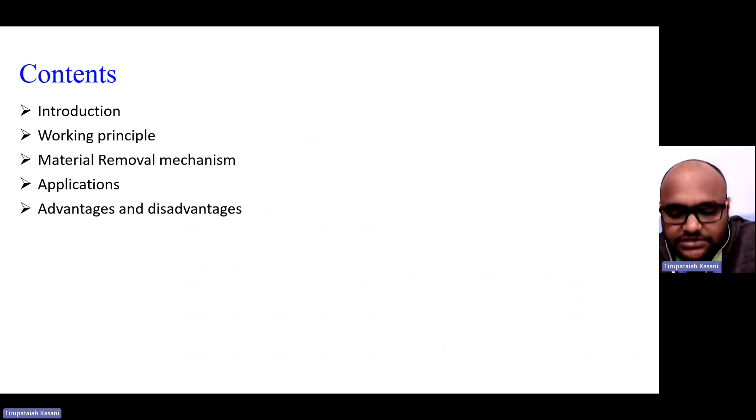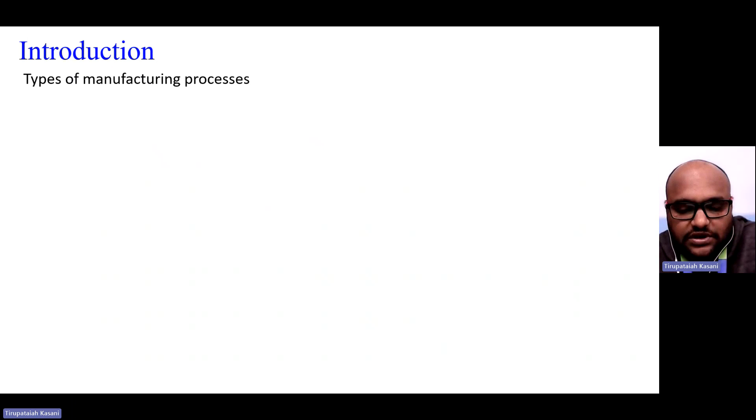First, we will start with the introduction part, that is, what are the different types of manufacturing process. We can categorize manufacturing processes broadly into casting, joining, forging, and machining.

The first one is casting, wherein molten metal is poured into a mold cavity, and we allow that molten metal to solidify as per the shape and size of the mold cavity that is created, to get the final product.

The next one is the joining process, wherein we can join two or more metals. For example, welding is a permanent kind of joint, while screws, nuts and bolts form a temporary joining process. We can also consider rivet joints.

The next one is the forging process. This is a kind of manufacturing process wherein the metal is subjected to compression force or tension force, either at room temperature or at higher temperatures, depending upon the type of material we are using.

For example, if we consider steel, to work over it and change its size and shape into the desired shape, we heat the metal to elevated temperatures, for example above 600 or 800 degrees centigrade. After converting the iron into a red hot state, we apply compressive forces to get the size and shape of the component we require.

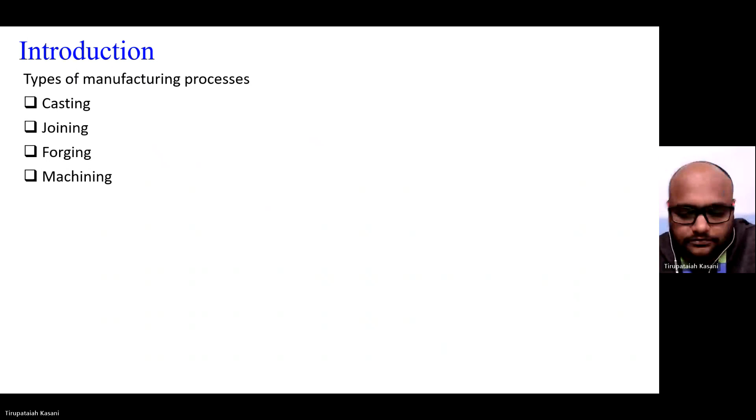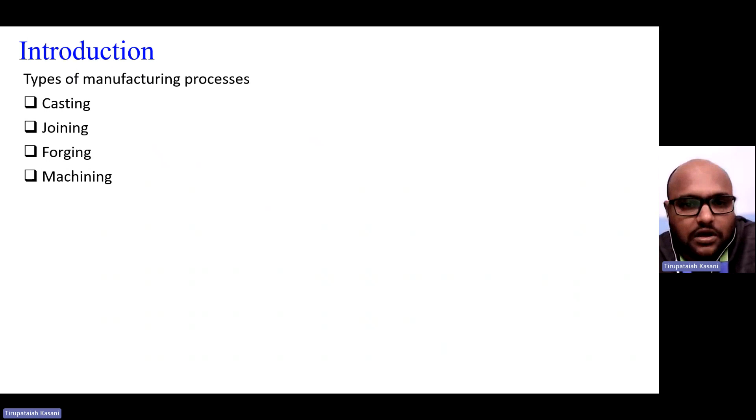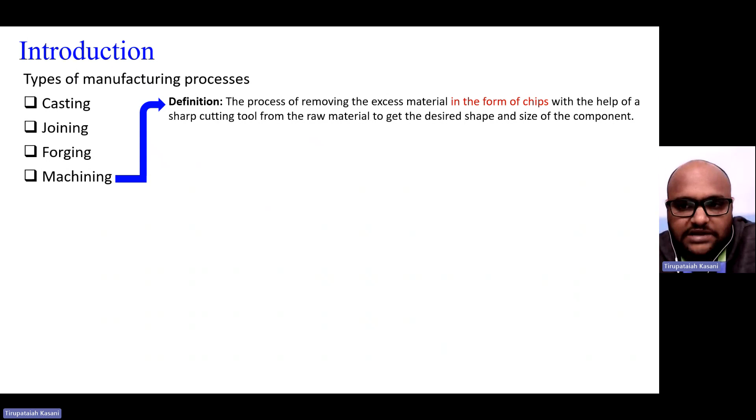And the next one is the machining process, wherein metal is removed from the bulk or raw material in the form of chips using a cutting tool. The definition of machining process is the process of removing excess material in the form of chips with the help of a sharp cutting tool from the raw material, to get the desired shape and size of the component.

Now we will look into the conventional machining process, wherein direct contact and relative motion between the workpiece material and the tool are a must. For example, lathe turning, drilling, and milling.

Let me open the pointer options. This is the lathe turning. This is the workpiece, and this is the direction of rotation after mounting in a 3-jaw or 4-jaw chuck. This is the cutting tool, and the feed motion is along the axis of the rotating workpiece.

This is the chip that is removed from the work material. This is the machined surface and this is the unmachined surface, and this is the cutting tool. The material removed from the raw material is called chips.

Another kind of machining process is drilling. Here it is the drill bit, this is the feed motion of the drill bit into the workpiece, and this is the rotation of the drill bit. After removing material in the form of chips, those chips are ejected out through the flutes.

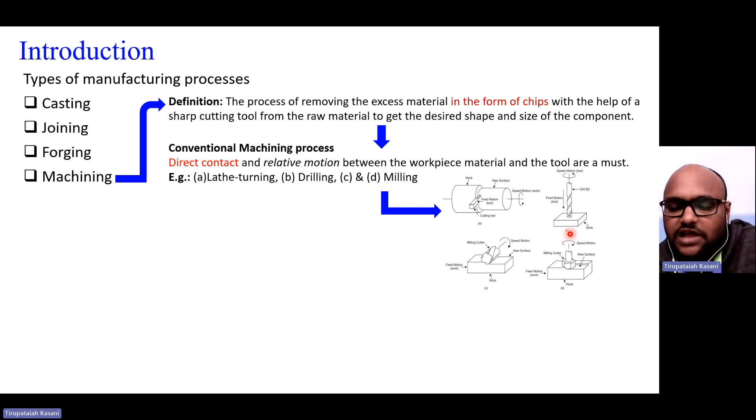Similarly, C and D represent milling. These two are milling cutters. This is a peripheral milling cutter, where the teeth are located on the periphery of the rotating element. And here is the end mill cutter, wherein the cutting teeth are located at the end portion of the rotating element.

These two arrows show the direction of rotation of the milling cutter and this is the slab. This feed motion is the workpiece motion, and this is the rotating cutter. The chip flow happens here, meaning the chips are ejected out in this portion.

Here in this case also, this is the work and this is the rotation of the milling cutter. This is the machined surface and this is the unmachined surface. Due to this rotation, the cutting edges come in contact with the raw material and the chips will be ejected out.

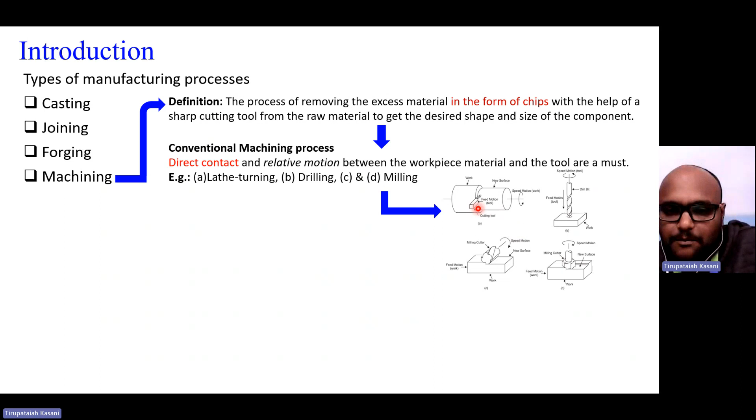Small chips will be ejected out as we remove material. In conventional machining processes, in all these four cases, direct contact of the workpiece and the tool is a must. That is the reason we call this a conventional machining process.

Then what is unconventional machining process? We can call it unconventional, non-conventional, or non-traditional machining process. This is a special type of machining process in which there is no direct contact between the tool and workpiece. Here, unlike conventional machining, there is no direct contact between the tool and the workpiece.

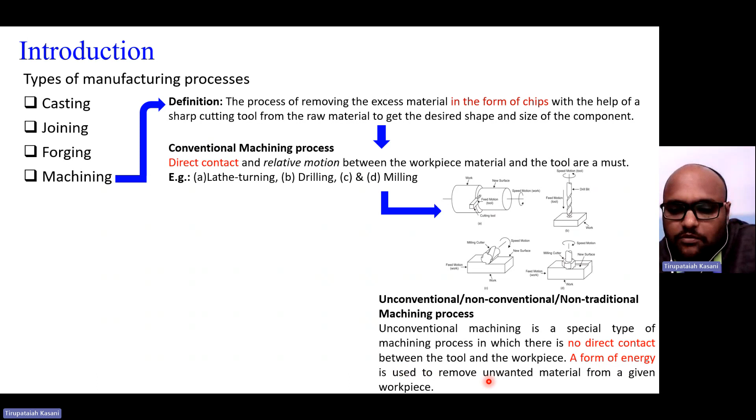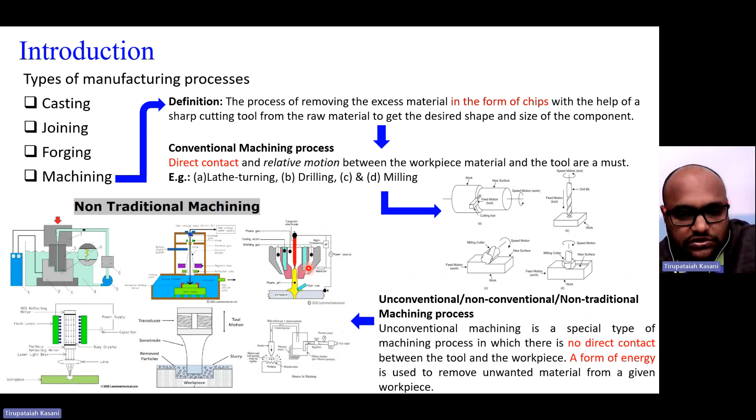We will try to understand these unconventional processes with their different kinds of applications, and what are the advantages and disadvantages associated with each machining process. Now we will see them one by one.

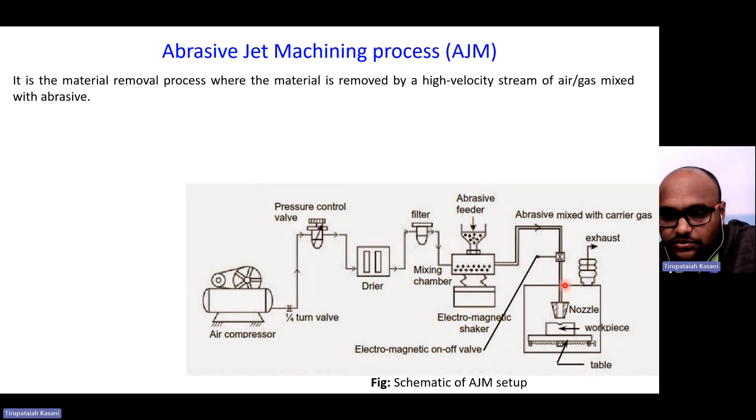Now we will see the material removal process, where material is removed by a high velocity stream of air or gas mixed with abrasive. We have already seen this is the mixing chamber. This is the air, and the abrasive particles will mix and flow through this nozzle. What is the working principle?

A focused stream of abrasive particles carried by high pressure air or gas is made to impinge on the work surface through a nozzle, and the work material is removed by erosion from high velocity abrasive particles. When the high velocity abrasive particle hits the top surface of the workpiece material, due to erosion the material is separated out from the workpiece in the form of chips. Those are taken away by the flow of air from the machining zone. This mechanism of material removal is erosion in abrasive jet machining.

The typical material removal rate, indicated as MRR, will be 1.8 to 5.8 mm cube per minute. These are typical values, not standard.

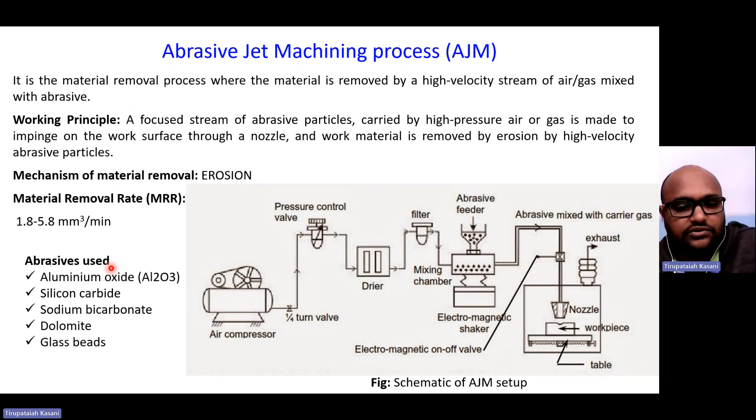Here are the abrasives. Different types of abrasives used in the AJM process include aluminum oxide (Al2O3), silicon carbide, sodium bicarbonate, dolomite, and glass beads. These are a few; there are others used depending on the material and the size of the material being machined.

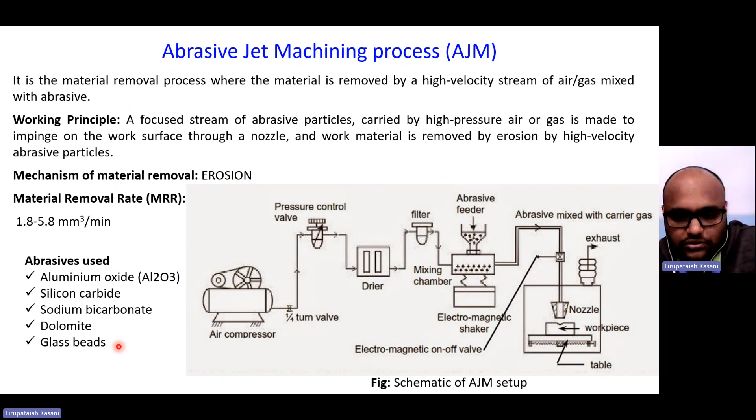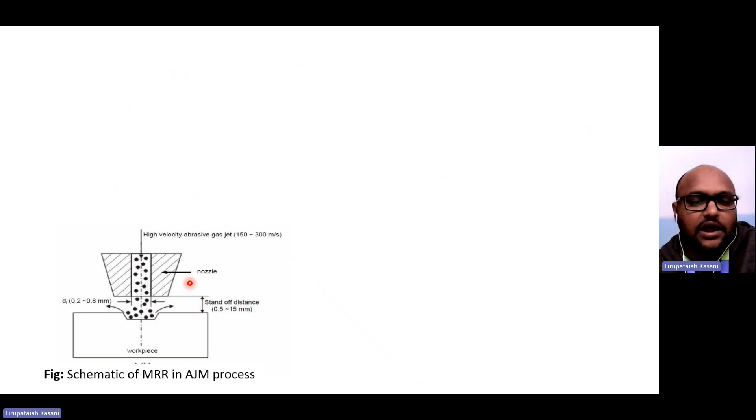This is a high velocity abrasive gas jet, 150 to 300 meters per second - typical values. This Di is the diameter of the nozzle tip, and this is the standoff distance.

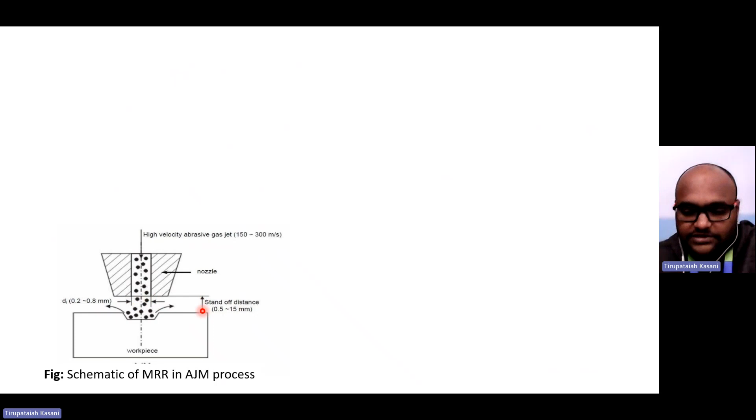This is the schematic of material removal. When it comes to the effect of NTD - what is this NTD? Nozzle tip distance, in the abrasive jet machining process. Here is the nozzle. If there is no workpiece, then the stream of abrasive particles along with air will flow like this.

From the starting point, means from the nozzle tip, as the stream goes down, it is bulging or diverging. The stream will be diverging. Means if the standoff distance or NTD, the nozzle tip distance, is the same or varies.

If the standoff distance or NTD is increasing to 0.75, 1, 1.5, 2 mm, see here, at 0.5 mm width of the material is removed. When NTD increases to 1 mm, the width also increases. Why? Because here it is diverging.

Means the top side surface of the workpiece material, as the distance NTD increases from 0.75 to 2 mm, the top surface exposed to the stream of abrasives and air is also increasing. That is the reason the machining area or region is also increasing, from 0.5 to 0.7, 0.7 to 1, 1 to 1.5.

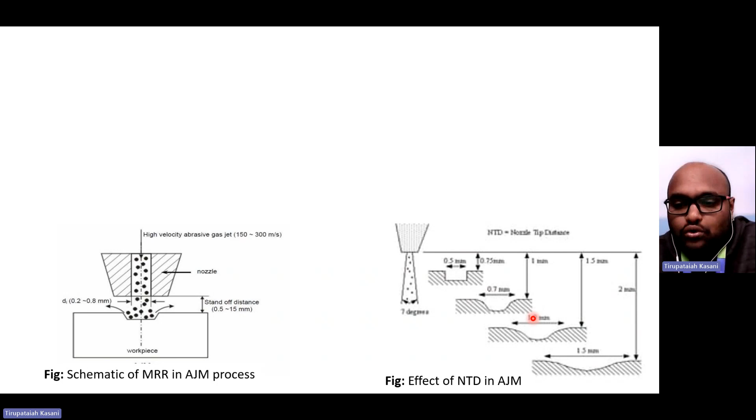However, the effect is different for different standoff distances or NTD distances. If I need a precise hole, I can maintain the NTD at a lower distance. If I need a curvature surface or a larger area where more material can be removed, I can maintain the NTD or standoff distance at 2 mm. So as the NTD or nozzle tip distance or standoff distance varies, the machining area or zone region also varies.

What are the different types of applications of this AJM process? Applications include frosting of glass, means machining of glass, and cleaning of metallic smears on ceramics, oxides on metals, and resistive coatings.

Means for example, corrosion resistant coating on some materials or metals. After use over some time, at some portions the resistive coating may be peeling off. To remove the remaining coating, we can use this type of machining process, abrasive jet machining.

Here it is used for drilling of glass wafers, wafers having very less thickness, and deburring of plastics. After machining of the plastics, some portions of the plastic stick to the bulk material. To remove those burrs, means deburring of plastics, we can use this.

And permanent marking on rubber utensils, for this also we are using abrasive jet machining. Engraving registration numbers on toughened glass, used for car windows.

Engraving registration numbers. Nowadays we can see in society that a few cars, high-end cars, are making the numbers using this technique only, over the glass.

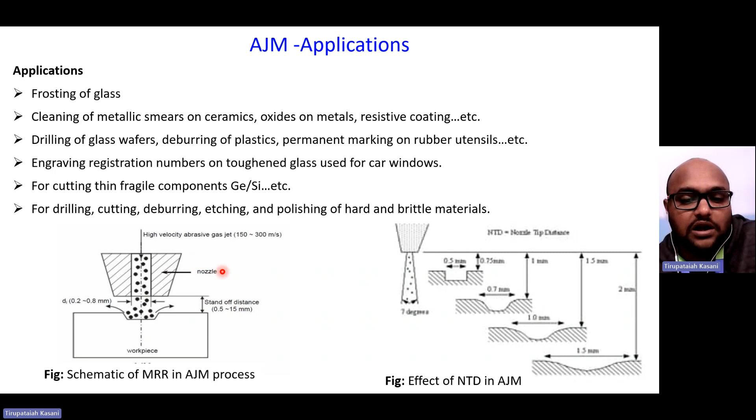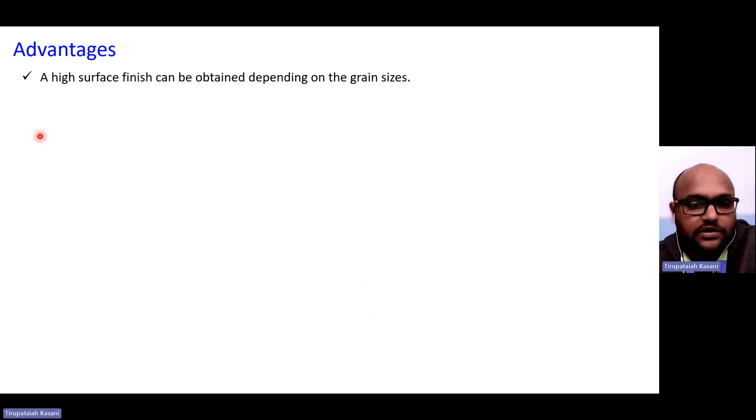Now what are the advantages of abrasive jet machining? A high surface finish can be obtained depending upon the grain sizes.

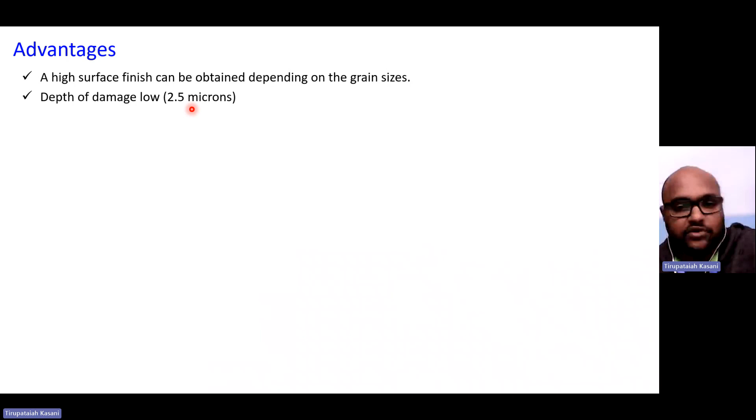Depth of damage will be low, that is, depth of penetration will be 2.5 microns. It provides cool cutting action, so it can machine delicate and heat sensitive materials.

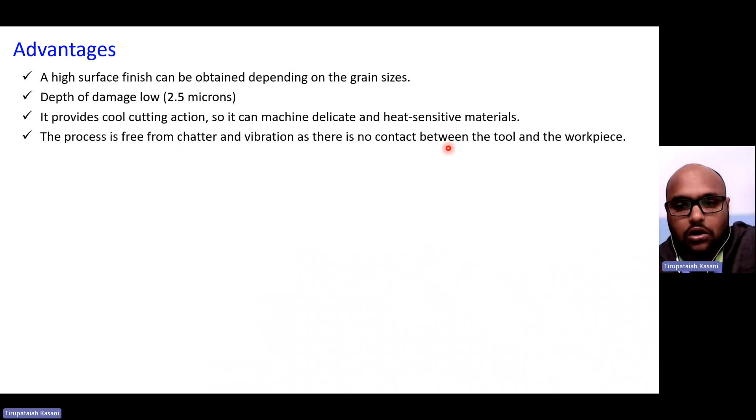The process is free from chatter and vibration. All of you know chatter is the vibration phenomenon common in a lathe machine when we are machining or turning long, higher slenderness ratio rods. There is no vibration here as there is no contact between the tool and the workpiece.

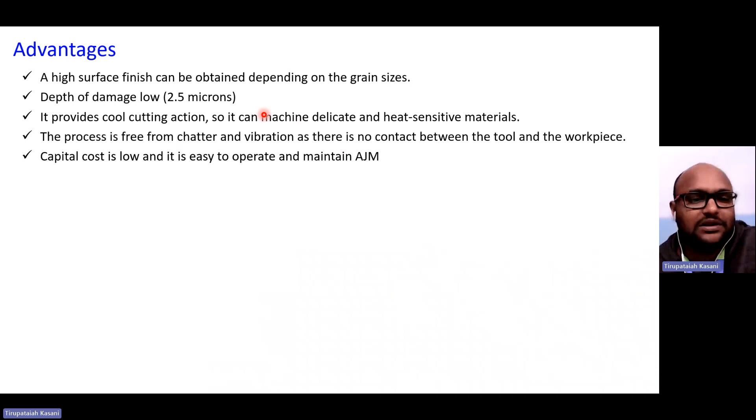Capital cost is low and it is easy to operate and maintain abrasive jet machining. The capital cost means hardly the cost of procurement of those abrasive particles. Of course, if there is a compressor, we can compress the air at any point of time depending upon the flow rate, how much pressure is required and how long. The capital cost is relatively low for abrasive jet machining.

It has the capability of cutting holes in intricate shapes in hard materials. But because the material removal phenomenon is erosion...

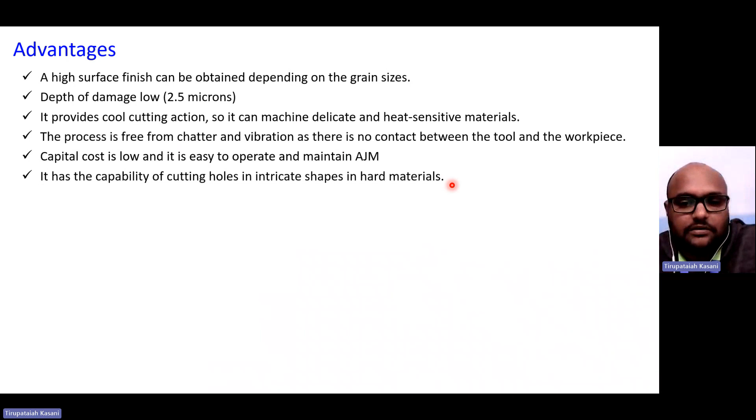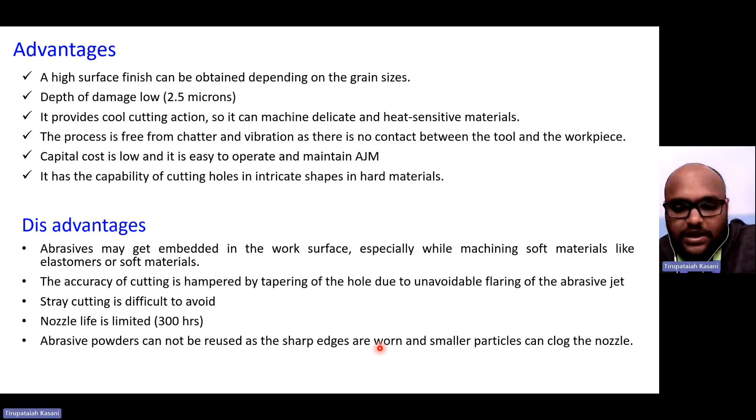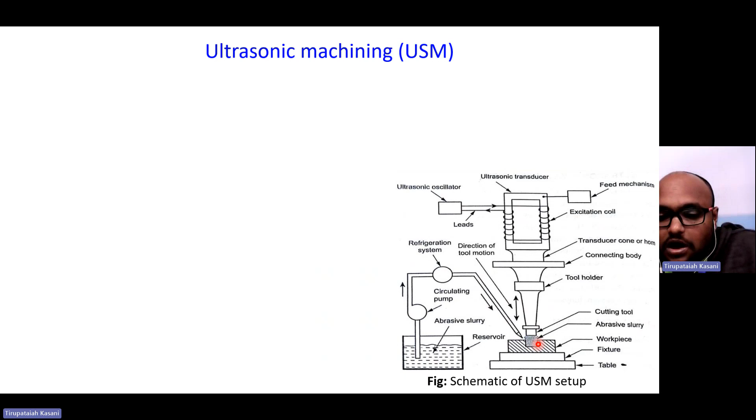For example, if we enlarge this machining zone, see here, this is the transducer, this is the tool motion, this is the sonotrode. I can call this the transducer, and this whole thing I can call the sonotrode, including the tool. Here we have the transducer, connecting body, tool holder, and the cutting tool. All of these I can call a sonotrode - in one single setup, with a single term.

When it comes to here, this tool will hit the abrasive particle and it will come and hit the workpiece, and the workpiece material is removed. A small amount of material will be removed in the form of a chip, and from here the chip along with the abrasive particles will move out, and again this will be refreshed. The chips are removed, and fresh sharp-edged abrasive particles are again mixed in this reservoir or tank, and again supplied to the machining zone to continue the machining process.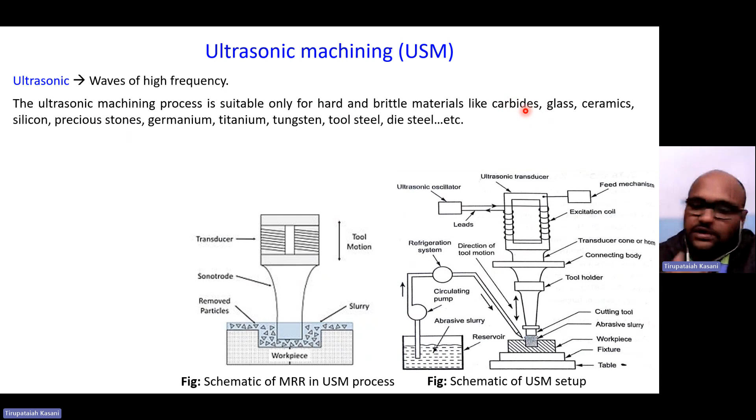Okay, these are the carbides. All of you know these are the carbide tools which are used for cutting tools, generally using lathe. Using lathe we can remove the material. The cutting tool materials are made up of carbide, that is generally tungsten carbide, silicon carbide, etc.

And here the working principle in this machining method: a slurry of small abrasive particles is forced against the workpiece by means of a vibrating tool, and it causes the removal of metal from the workpiece in the form of extremely small chips. This is the slurry flow from here to here.

Mechanism of material removal is brittle fracture or abrading action. Brittle fracture means, for example, here it is brittle materials like carbides and glass - these are brittle in nature. That is the reason why it's called brittle fracture or abrading action - another name for the material removal.

Here also, the typical material removal rate is 15 to 20 mm³ per minute, and the abrasives used are the same as earlier: aluminum oxide Al2O3, silicon carbide SiC, boron carbide B4C, and diamond particles.

Here it is ultrasonic machining parameters, or the process parameters, and the applications. What are the different types of process parameters? Earlier in abrasive jet machining, NTD and the nozzle diameter, particle diameter, and air pressure, airflow were the process parameters. Similarly here also: abrasive slurry, abrasive grains plus water content is 20 to 30%, vibration frequency is 20 to 30 kilohertz, and amplitude 25 to 100 microns is the tool motion or movement of the tool.

Here it is the wear ratio, 1.5 is to 1. Wear ratio - what is wear ratio? Material removed from the workpiece to the material removed from the tool. Why? Because when the tool comes and hits the abrasive particle, if the tool material is made up of copper, which is ductile in nature, that sharp cutting edge abrasive particle will be embedded by this ductile material tool.

There may be some removal of material of the tool also, a small amount. This is because of the impact of the tool, a sudden contact with high pressure, hitting the abrasive particle. In turn, the abrasive particle hits the workpiece material to remove more material from the workpiece. That is why material removed from the workpiece is 3 times, and material removed from the tool is roughly 2 times, so I can say the ratio is 1.5 is to 1.

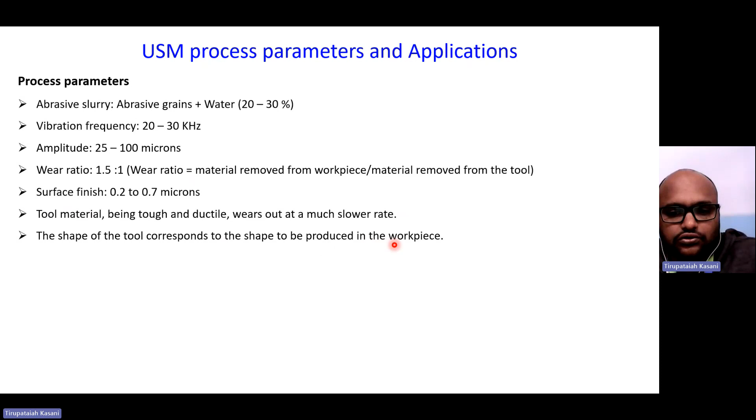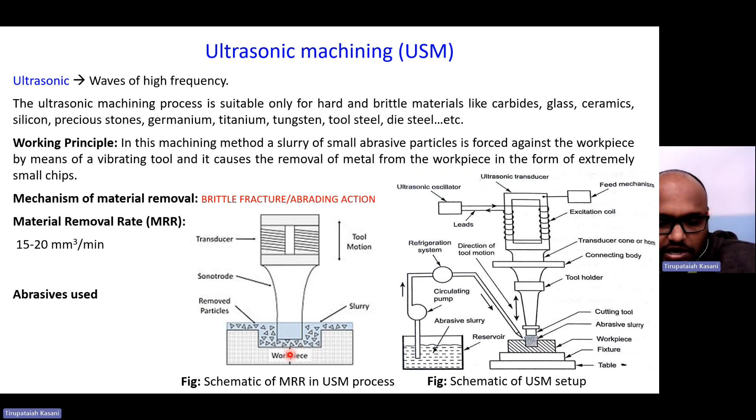The shape of the tool corresponds to the shape to be produced in the workpiece. As we have seen, this rectangular shape of the tool creates the same shape of cavity over the top surface of the workpiece. Similarly in ultrasonic machining, if I want to create a curved surface, I first create a curved shaped tool, so that I can create the same type of cavity in the workpiece. So the shape of the tool and the shape of the cavity to be created are the same.

Now the applications. Precise and intricate shaped articles can be machined, since we can precisely control all these parameters to remove material from the workpiece. Holes as small as 0.1 mm can be drilled using this ultrasonic machining process. It is effectively applied to machine glass, ceramic, tungsten, precision mineral stones, etc. It is used for making tungsten carbide and diamond wire drawing dies.

These are used in forging process, and this is the wire drawing operation. Those dies are machined using ultrasonic machining, and dies for forging and extrusion processes are also machined using this ultrasonic machining process.

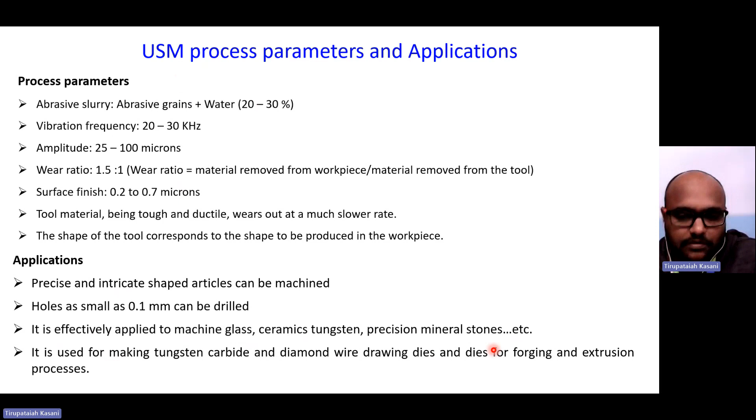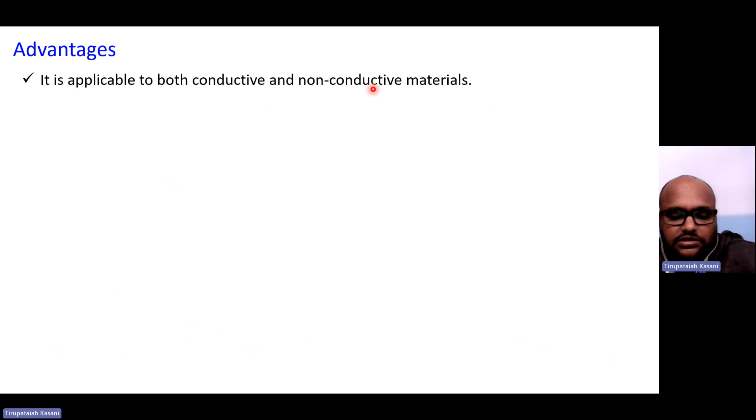What are the advantages of this ultrasonic machining process? It is applicable to both conductive and non-conductive materials, because there is no power supply to the workpiece directly. Only the vibration motion of the tool is transferred to the abrasive particles, and those abrasive particles hit the top surface of the workpiece to remove material. Irrespective of material conductivity, this machining process can be used for any type of material, suitable for very hard or brittle materials such as graphite, glass, carbide, and ceramics.

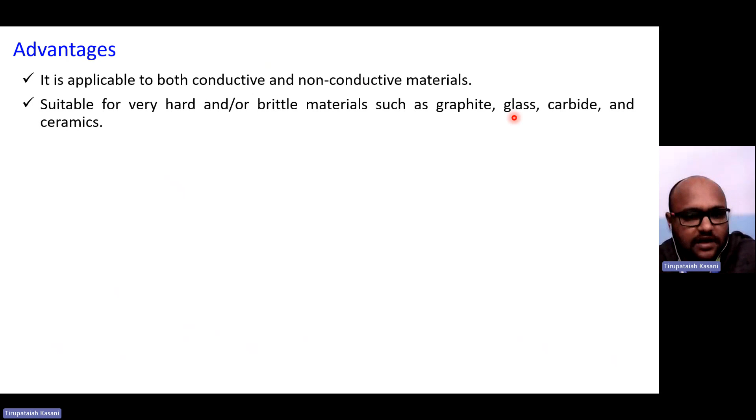USM is also used for machining semiconductors such as silicon and germanium. As you know, these semiconductor materials are doped, used in doping systems, PN junction diodes, and so on.

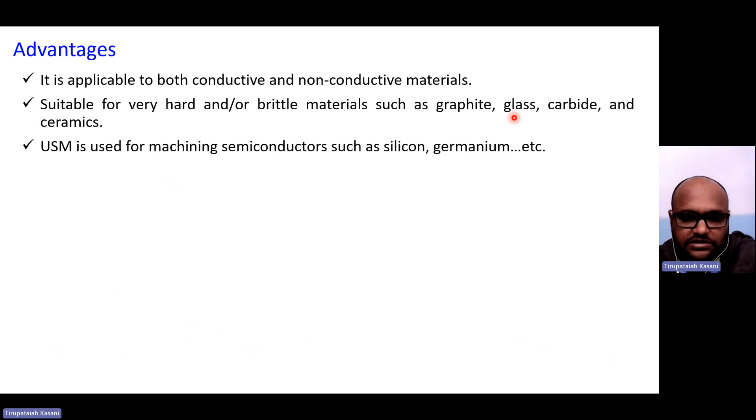USM doesn't produce abnormal electrical, thermal, or chemical surfaces. This is because, if there were electrical power supply to the workpiece, the slurry coming in contact with the workpiece could affect the machined surface, for example if excess heat is induced at the machining zone. But here the amount of heat produced during machining is very little, and whatever heat is produced is taken away by the water, that is, the slurry medium.

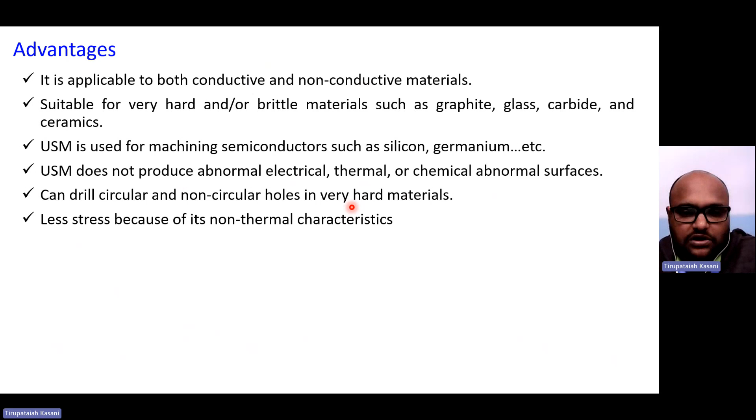As for chemical abnormal surfaces, there are no chemicals involved here, only water and abrasive particles. If chemicals were used in the slurry, the machined surface would get affected. USM can drill circular and non-circular holes in very hard materials, with less stress because of its non-thermal characteristics, since there is no high amount of heat generated at the machining zone.